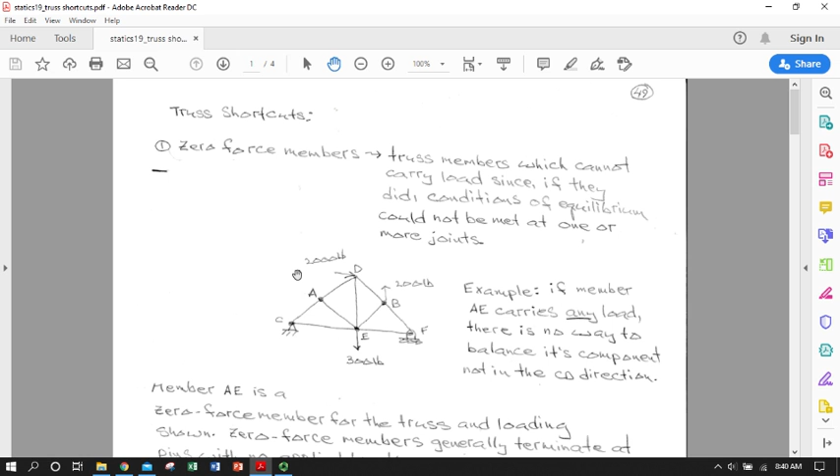If you can spot a member and be sure that it is a zero force member, you can just take it out of your FBDs. You can just not include it. Now, I hope you recognize the obvious danger to this. If you think something's a zero force member, maybe because you drew it in such a way that suggested it was, but it turns out not to be, and you take it out of your analysis, everything else will be very wrong. So be very, very sure.

So what's one way we can be sure? Well, first of all, a zero force member is going to end on pins, at least one pin, that doesn't have a force. So if I look at member DE here, DE ends on pin D and pin E. There is an external force at both of those pins, which means it's possible for DE to carry load. Candidates for being a zero force member: AE only, because every other one of these members ends on either a support reaction, which is going to be carrying some kind of load, especially because this is a simply supported truss, or where we have a directly applied external load.

AE, on the other hand, has point A, which doesn't have an applied load. Now, just because you're ending on a joint that doesn't have an applied external load or support reaction, which is an external load, doesn't mean it's a zero force member. We then have to go the other step and say, could we write equations of equilibrium for that joint and show that if that member carried any force at all, it would be impossible to satisfy the conditions of equilibrium.

If we look at the case of AE, we can at least eyeball that and show that it's true, because basically the members CA and AD are collinear. So they can only apply load in their direction of orientation, and AE is coming in with a component, a significant component, that's perpendicular to that. So there is nothing in forces AD and AC that can necessarily oppose all the components of AE, particularly their horizontal components. It's going to be unbalanced. So if AE carries a load, we cannot put pin A into static equilibrium.

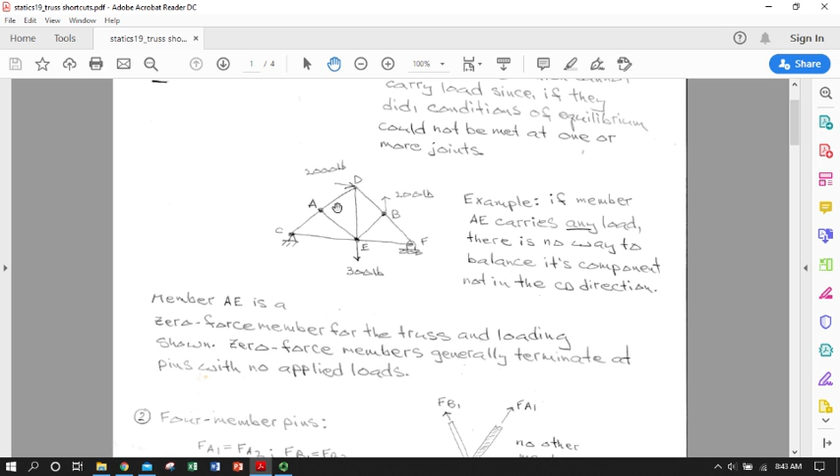We could go ahead and write that out and show it rigorously, but if we did that, we might as well just include it in the method of joints and just show that it ends up being zero. So we can recognize this just because it's coming in perpendicular, or close to it, to two other members that are collinear going through a joint that has no other loads applied. So AE is a zero force member. We could simply remove it from the truss, do the analysis, and we'd get the right answer in all the other joints.

Okay, another shortcut, less powerful but might save some time: a four-member pin. So if you have a pin and you've got four different members going through, and especially if they're all in tension, it's easy to see that they'll almost act like a continuous member. And so we can say that FA1 is equal to FA2, FB1 is equal to FB2. So they kind of reflect across.

Again, you could go and show this rigorously if you wanted. The point of the shortcuts is to see it and then be able to apply it without necessarily having to rigorously apply the equations of equilibrium.

I'm speaking with so much caution because if you apply one of these shortcuts wrong, your entire solution will be wrong. By default, you can always drop back to the straight up method of joints or method of sections that we'll get to later and always get the right answer. So these shortcuts should be used very, very judiciously.

The final one is what's called a non-collinear member. Again, this is one where you can see that if there are no external forces applied at a given pin, then the forces in all the members going through that pin have to be zero, because there is no way that they can carry load that would be opposed by a load in the other member going through that pin that would balance it. So you can see members CB and BA can't carry load without there being some component of the force in one or the other that isn't opposed. So both CB and BA have to be zero force members in order to put B into static equilibrium.

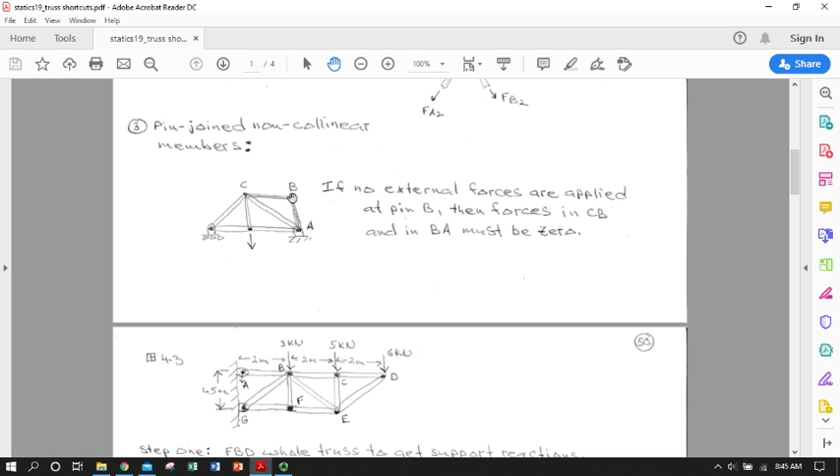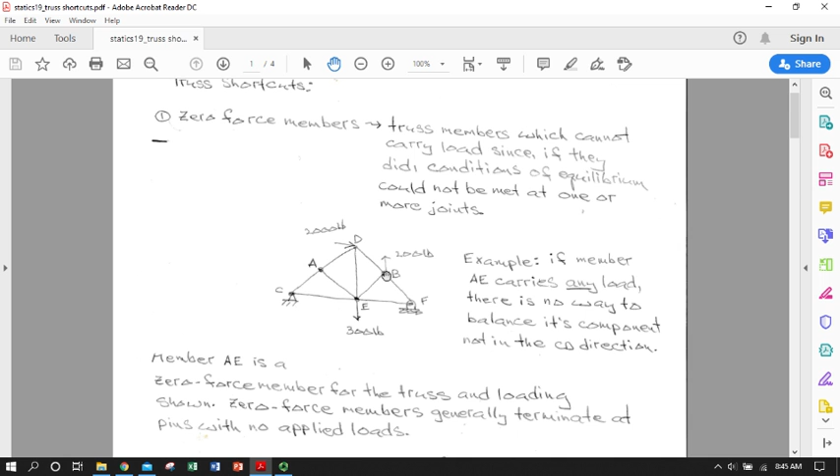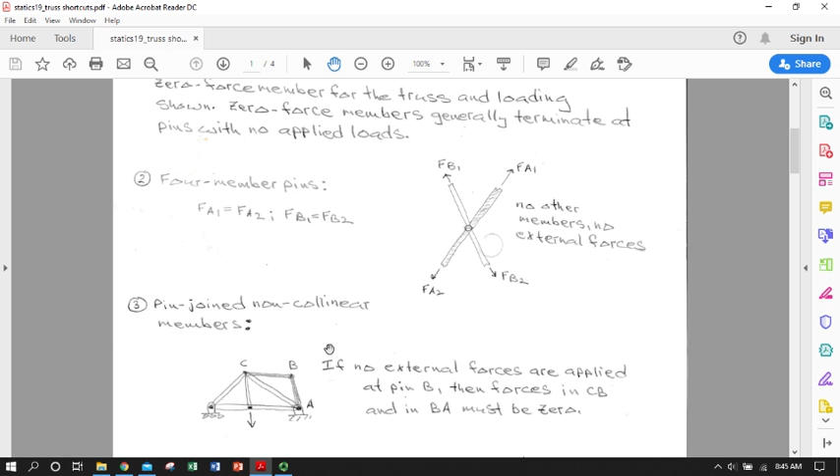So this often happens when you have a pin that just has two members and they're not collinear. That's a bit similar to the rationale here for the four-member pin where the collinear members have to have the same load. So three shortcuts: zero force members, four-member pins, non-collinear members. None of them can carry load because if they do, the pins where they join cannot be put into static equilibrium. So let's go to an example where we can deploy that.

So this is example 4.3. We have a cantilevered truss. These are kind of exciting. In this case we have two hinges. So rather than having one of these only apply force in one direction, both A and G can apply force in two directions. So each one can apply a vertical and a horizontal force. We've got 1, 2, 3 applied loads, and we've got a whole bunch of members here.

So we're going to be looking for shortcuts that will help us out. I hope you can start taking a look, now that you know what the shortcuts are, and start browsing for them. I could say, hey, maybe point D is non-collinear. But no, I've got an applied load, so that isn't going to work. Well, CE might be a zero force member. Look, it's ending perpendicular to the line made by BC and CD, but I've got an external load, so that sure isn't going to work. This is a pretty standard joint.

This is a pretty standard joint, but I might want to take a look here at pin F. I have member BF coming in. There's no external loads being applied at pin F. So there's really no way for any kind of load in GF, which is totally horizontal, or FE, which is totally horizontal, to oppose a tensile or compressive force in the totally vertical BF. So if BF has any load at all in it, pin F will accelerate up or down. So I know BF is a zero force member.

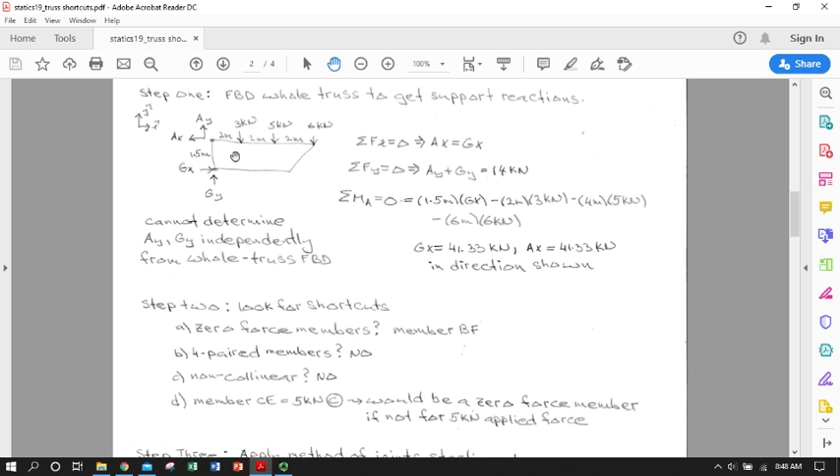I have the support reactions at point A represented here, A sub x and A sub y. I've chosen to draw the support reactions at G with the horizontal force in the opposing direction, just because those are the only 2 horizontal forces in the truss, so I know they've got to be going different ways. They may be opposite of the way I've drawn, but I know they have to be in opposition to each other. And I've chosen to draw G sub y in the vertical direction. We don't know if it will end up that way.

I'm using the 2-meter lengths of members AB, BC, and CD to position my 3 applied vertical loads. So I can write my equations of equilibrium for the whole truss. Sum of the forces in the x is 0, so A sub x is equal to G sub x, which I kind of did deliberately. Sum of the forces in the y is 0.

So I have A sub y going up, G sub y going up, and that is being opposed by 3 plus 5 is 8 plus 6 is 14 kilonewtons downward. So A sub y plus G sub y equals 14 kilonewtons.

Now I'm going to deploy my moment equation, and take the sum of the moments about point A. That means I'm going to remove A sub x, A sub y, and G sub y from this equation, though they're still in the other equations of equilibrium.

I will have G sub x at a radius of 1.5 applying a positive moment, opposing the negative moment about point A from all 3 of my applied loads at their respective 2-meter, 4-meter, and 6-meter radii from point A. Everything's perpendicular, so I don't have to worry about signs of angles or taking cross products. So the moment about A drops out my support reaction G sub x.

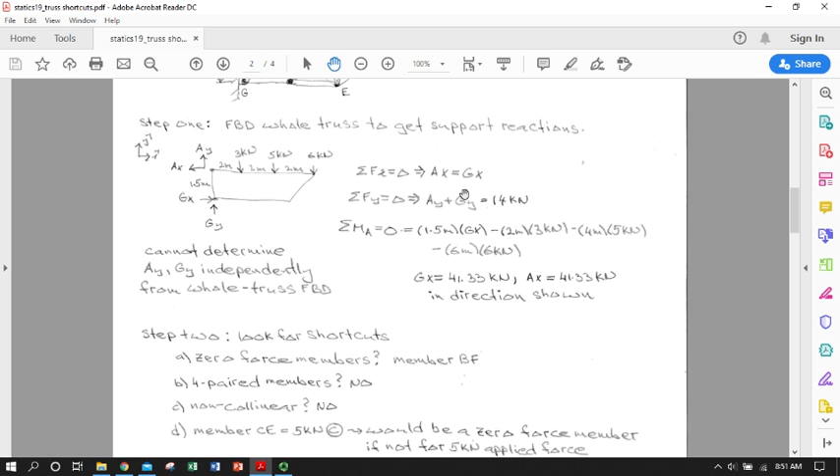So I have 41.33 kilonewtons, in the direction shown, which immediately gives me A sub x, and leaves A sub y and G sub y related to one another, but no independent solution for either one. I'll have to write one in terms of the other and solve for it with my method of joints, my joint equilibrium, using my other forces at points A and G, and get that later on, which is fine. We will have plenty of equations.

So step 2, look for shortcuts. We kind of did that before we did our whole body FBD. Look for zero force members - we found one. Four paired members, no.

Non-collinear, no. So we can take a look at member CE here. We checked that out to see if it was a zero force member, and found that it could have been if we didn't have an applied load there, but we do, so it's not. We gave it the hairy eyeball.

Okay, so now we're ready to dive into our method of joints. This is going to be a long haul because we've got a lot of members and a lot of joints, and we want to solve the whole truss. So now we're back to exactly the same method that we did in our two previous examples.

Just to orient myself, I've chosen to start out at the end, at point D. You can see at point D I've got two members coming in. Every one of my 2-dimensional method of joints equilibrium analyses is going to give me 2 equations, so I know I can get both members at D. I can cascade that back in, maybe save myself some math.

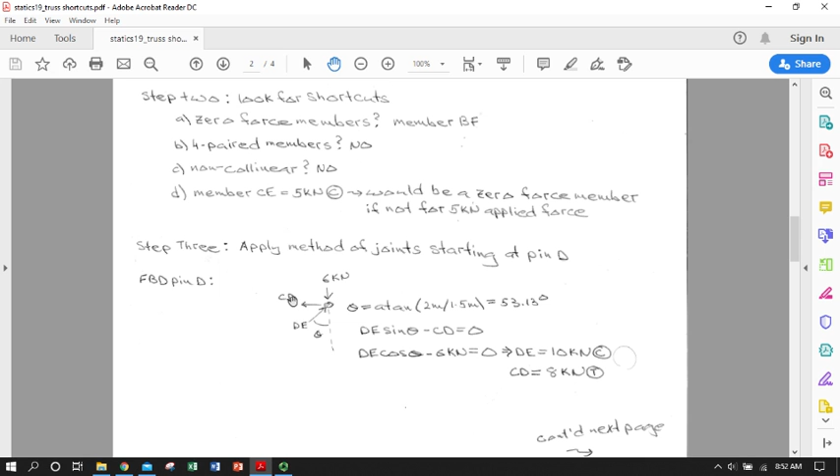So I have my 6 kilonewton externally applied load in the vertical. I've chosen to represent CD as having a tensile force. It's pure horizontal, and I have DE coming in at an angle theta, which I had to get from my geometry. I have 1.5 meters here between points A and G, same as between points C and E, and then 2 meters. That gives me my angle theta - basically this angle. Subtract 90, arctan of 2 meters over 1.5 meters. So this angle is 53 degrees. So I apply some of the forces in the X and the Y.

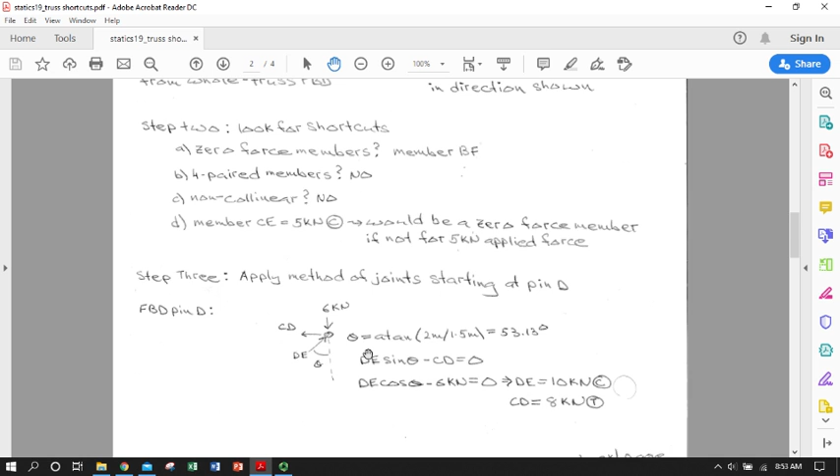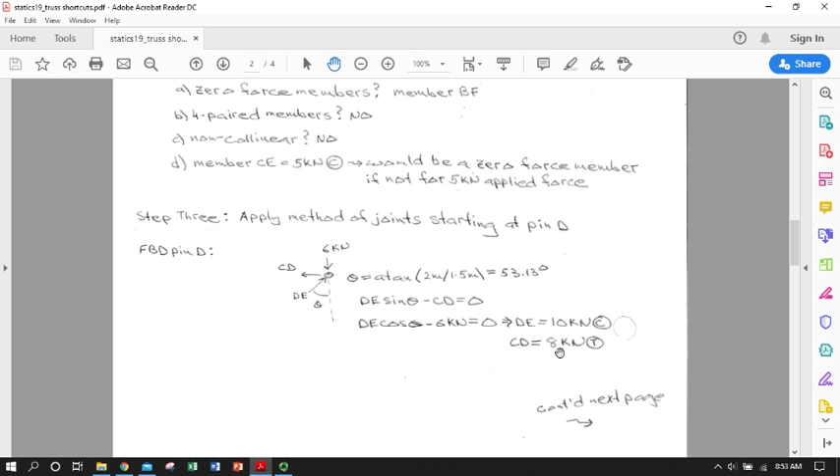I have X components: sine theta times DE minus CD equals 0. And then I have cosine theta times DE opposing 6 kilonewtons. That gives me DE, plug it back in here, that gives me CD, and I end up showing that member DE is carrying 10 kilonewtons and it's in compression, and then CD is carrying 8 kilonewtons and it's in tension. So I guessed right on directions.

So moving over to pin C, let's just go back and look where that was. I'm moving one spot over to the left, pin C. Now I've got 1, 2, 3 members coming in. I already know CD. I got one externally applied load, so I should be able to get the forces in members BC and CE with my two equations of equilibrium, if I do it correctly.

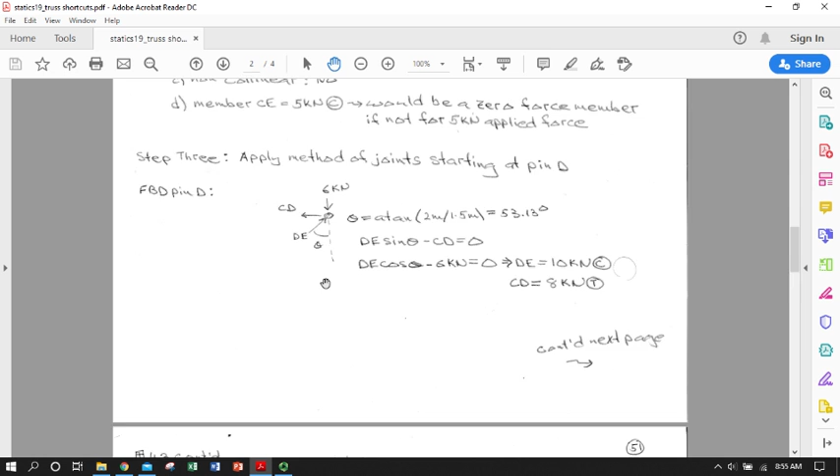All the members are coming in orthogonally and aligned with the coordinate axes, so this is pretty easy. I have my 5 kilonewton applied load. I have 8 kilonewtons in tension that I saw back at the previous pin, at pin D - so if it's in tension, it's pulling. I used the fact that I have 5 kilonewtons coming in vertically, and I only have one member to oppose it, so I actually did a very quick sum of the forces in the Y without actually writing it out. And I assigned member CE, having to go back and forth and look.

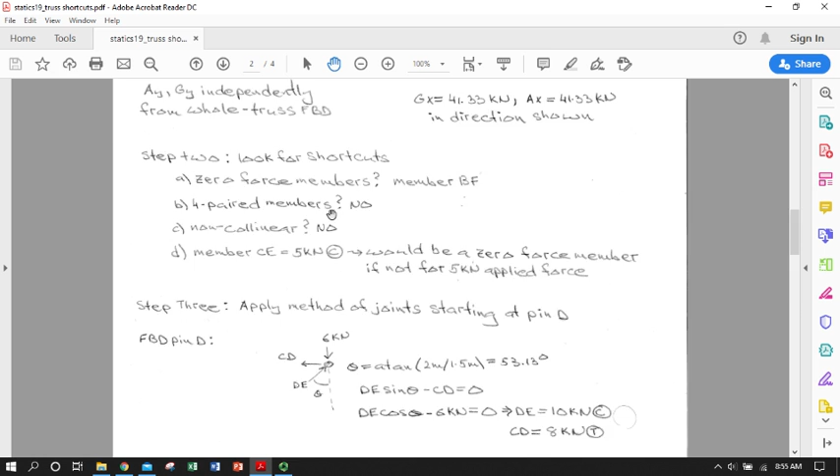Member CE is the only one that can oppose that 5 kilonewton applied load, so it's carrying the entire applied load. That forces it to be in compression. The pin is being pushed up by member CE, and pushed back on, so it's in compression. That leaves member BC to oppose our 8 kilonewton load, meaning it has to be in tension. So now I have CE and BC.

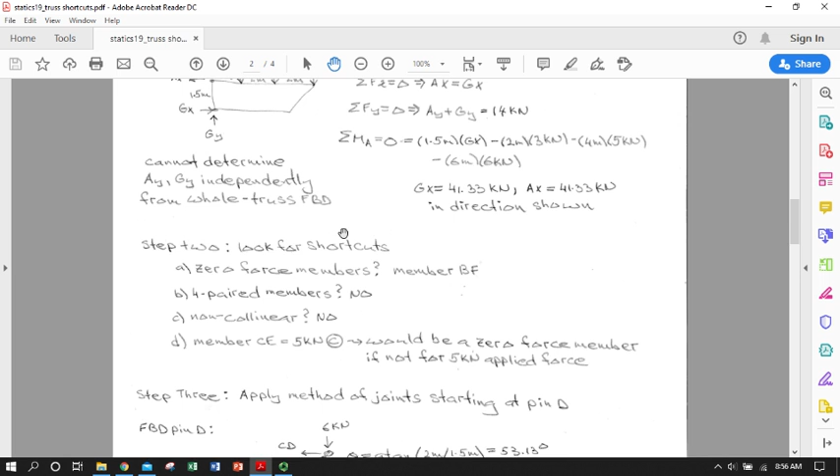So I'm going to move to pin E down here, and I now know the load in CE was 5 kilonewtons. I have my load in DE from my analysis of pin D. So if I put pin E in static equilibrium with this load known and that load known, I can get these two with one equation. Let's take a look at how we did that.

Now we have things coming in at angles. DE is coming in again at angle phi, defined as 36.8 degrees, using the geometry of the truss. I have 5 kilonewtons of compression coming down from CE, which I solved for in the previous FBD of pin C. I'm going to choose to represent BE as being in tension and FE as being in compression.

Run through my equations of equilibrium, sum of the forces in the X. I'm going to have member FE in compression pushing to the right, that's the positive X direction, minus BE cosine phi minus DE cosine phi, but I know that DE is 10 kilonewtons. Sum that up, I got two unknowns.

So I'll turn to my equations of equilibrium in the Y. I have BE sine phi minus 5 kilonewtons minus DE sine phi, and I know DE is 10 kilonewtons, so it's only one variable. I can get the force in member BE is 18.33 kilonewtons, in tension. I can plug that back in and get my requisite amount in FE, which is compression. Notice this was positive, that's positive, meaning the direction I drew it in the method of joints FBD of pin E was correct. So we have BE in tension and FE in compression.

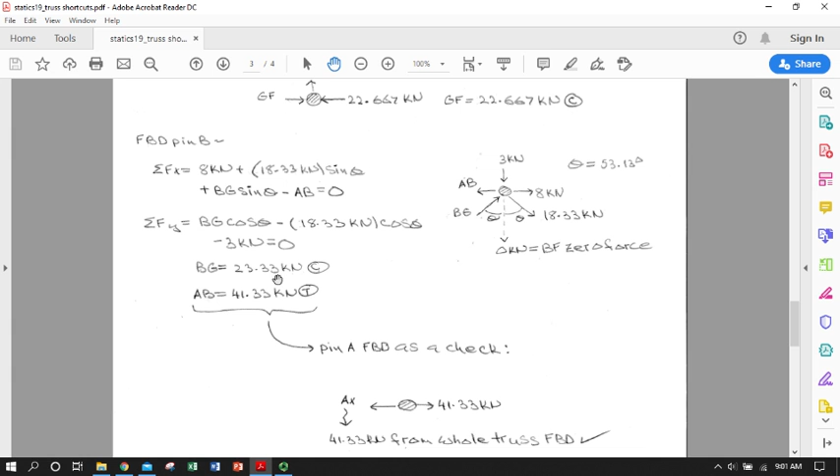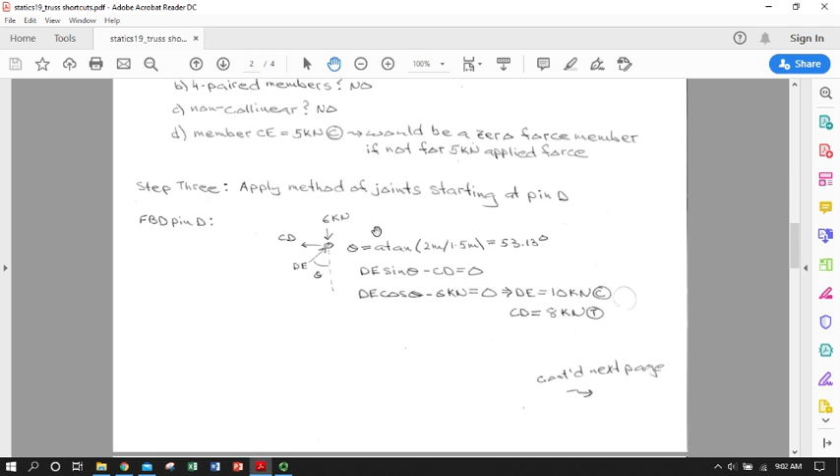And we're going to reserve pin A as a check, its X component. So remember, we had already solved for the X component at pin A way back in our support reactions. A sub X equals G sub X.

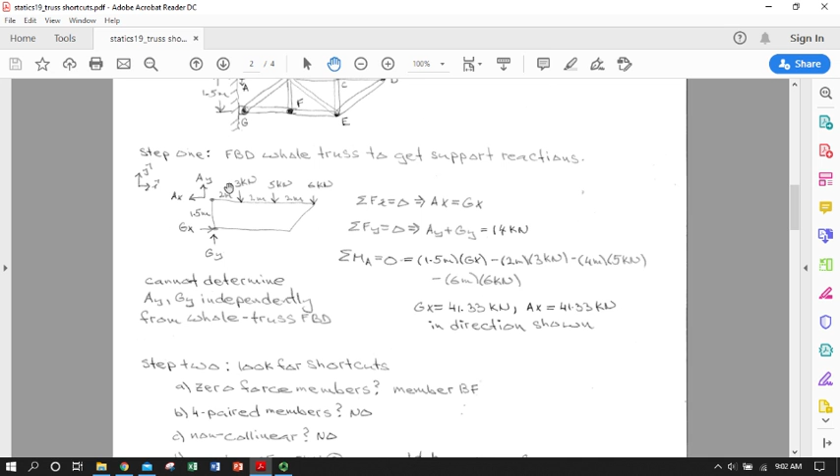We were able to get G sub X from the moment equation, and so we were able to show that A sub X was pulling, that support reaction was pulling on the truss with 41.33 kilonewtons. So A is pulling, the support hinge is pulling on point A.

So we better hope that AB was tension. And it was. So we have our first check.

We have now checked the horizontal component of our truss against the one horizontal support reaction that we had available there. So now we need to apply what we had just solved for in member BG to get our Y component of our G sub Y support reaction.

And we'll also pick up an X check. So we use G sub Y. We do an FBD of pin G down at the lower support reaction, and we solve for G sub Y equaling what we just had solved for.

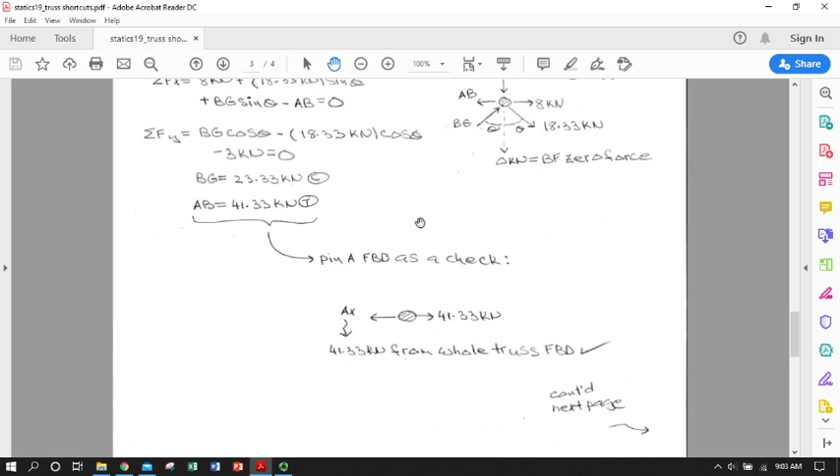And remember coming in here, remember the name? BG. So BG cosine theta, the Y component is going to balance G sub Y. That gives us a G sub Y of 14 kilonewtons upward.

So that means, going back to our whole truss FBD, that G sub Y is pushing in the direction shown. So it's pushing up, so that hinge is pushing up on pin G.

So if I go back here and I plug in that 14 kilonewtons, I find that A sub Y is 0. So the hinge at A isn't applying any upward force.

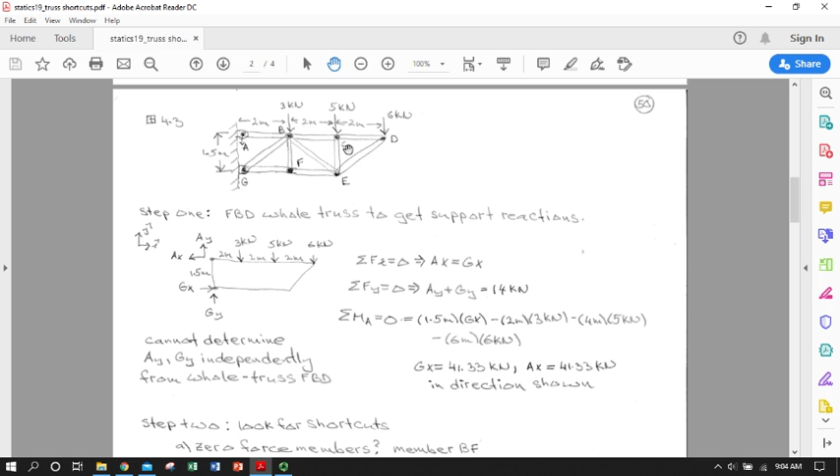This upper hinge isn't X only. It could apply a force in the Y. If we changed any one of these applied loads here, it might need to. But as loaded now, it doesn't have to. Just because you can apply a support reaction doesn't mean you will. But you have to allow for the possibility, so you have to solve for it.

And we also get a check here with our X component, already knowing what our G sub X is, having solved for that way up in our very first support reaction from our moment equation. This is our 41.33 kilonewtons that we solve for from our support reaction using the sum of the moments at point A. We know it's pushing on pin G kind of as a compressive member, pushing to the right.

And if we take the X component here, and then the other horizontal load carrying over, those do indeed sum to 41.33, and that provides our final check. So we have solved our truss support reactions.

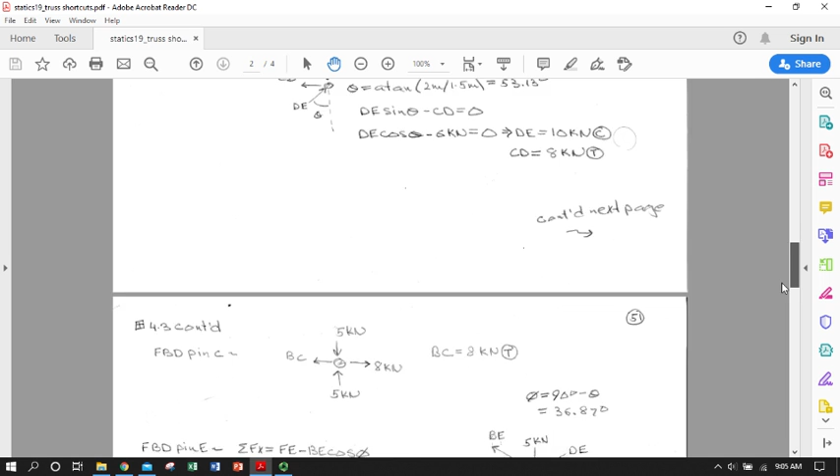All four, one of which ends up being 0, and all of the forces in our members, including the one which was a zero force member.

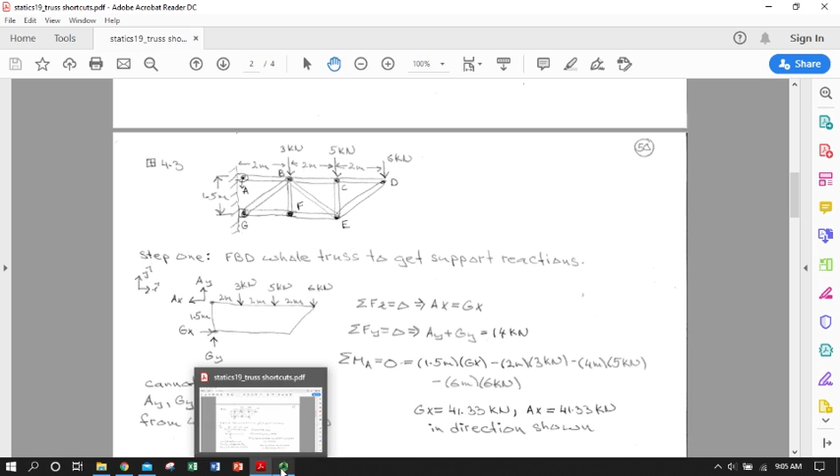So that is it for this lecture. We've now gone through an example of a truss shortcut and done a nice reinforcement of the method of joints.

Next topic, we will move on to looking at truss solvability. So we'll start applying very rigorously our number of equations and unknowns with respect to the number of pins, the number of support reactions, and the number of members, so we can decide whether or not it's worth jumping into an analysis right from the get-go, or whether we can tell somebody, nope, sorry, your truss is going to accelerate, or it's overconstrained. I can't give you a single unique solution.

I may be able to give you some members, but some will just be written in terms of others. In other words, there might be an infinite number of solutions. So we'll be able to tell that just by counting, and so we'll do a little bit of math and get set up in terms of that so we can identify things faster.

And then when we're done with that, we will be ready to jump into the method of sections, which is basically the second big method used for truss analysis. And it is especially useful if you only need to know the force in one or two members and don't need to solve the whole truss. So we'll talk to you then.